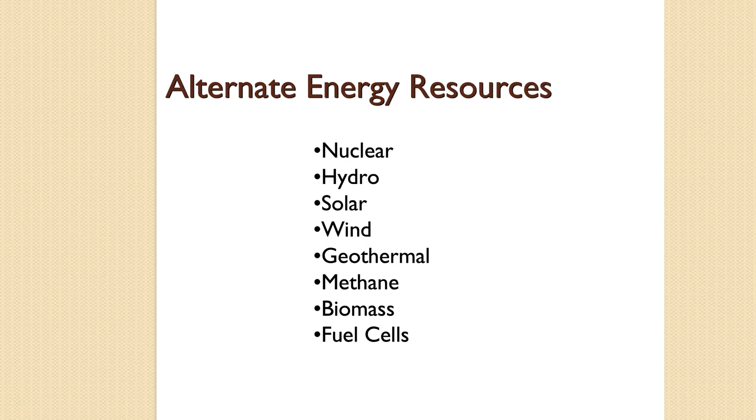First on the list is nuclear. It's been around for a while, and it is popular. As far as your notes, the part you need to know is about fission, which is our current technology, where the atom is split.

Now, you don't have to know all this, you don't have to know nuclear science. I just have this on here to let you know that extra neutrons are added to an unstable uranium atom that then splits and gives off enormous amounts of energy, creating a chain reaction. Our technology is where the atom is split, called fission.

This is really all you need to know for the test. Now, there are some problems with it: a very long half-life. That's how you describe the radioactivity of something—you might say its half-life is 4 million years, meaning 4 million years from now it'll have half the radioactivity it does right now. A lot of this stuff has a very long half-life.

Some of it's thousands of years, some even millions of years, which means waste is an issue—storing that waste. And then finally, add this to your notes, this is important too: uranium is non-renewable. It's non-renewable because once we split that atom, it's no longer uranium, so it is, in a sense, burned up or used up.

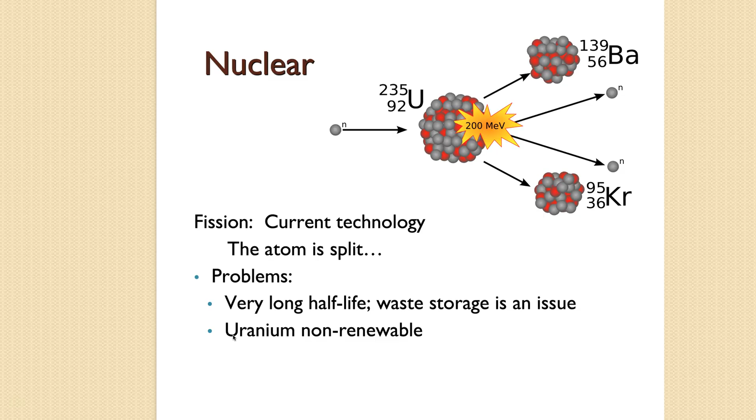So uranium is non-renewable. The way it basically works—you don't have to take notes from this, this is just to help you understand it—this is the reactor, and remember it gives off enormous amounts of heat. In that reactor, they have heavy water, and that heavy water gets heated, and then heats normal water to create steam.

Remember before when we talked about the coal-fired plant, how you use steam to run the generator, that's how you generate electricity. The nuclear power plant is essentially the same—you're basically burning the uranium in the reactor and generating enormous amounts of heat to boil water to make steam to run the turbine.

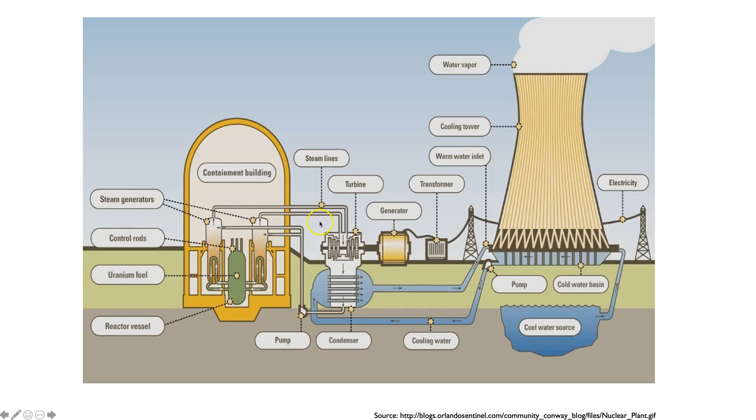Again, nuclear power plants will have these cooling towers. We've seen these before, and you might see these kinds of cooling towers at coal-fired plants and nuclear plants. That water used to make steam has to be cooled before you put it back out the river. But you can tell this is a nuclear power plant by this building shape—that's a containment building, with a very distinct shape.

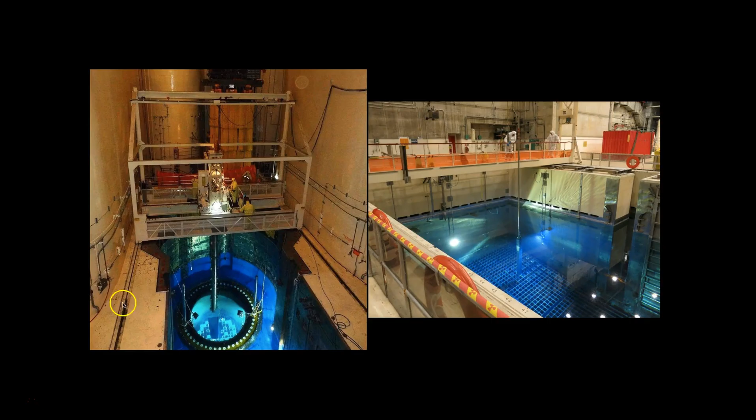If you were to go inside, you would see—and again you don't have to take notes from it—the infamous color and glow given off. These are control rods that they raise and lower. You can see here where they're working within the chamber, and as they raise the control rods out, it allows the reaction to take place.

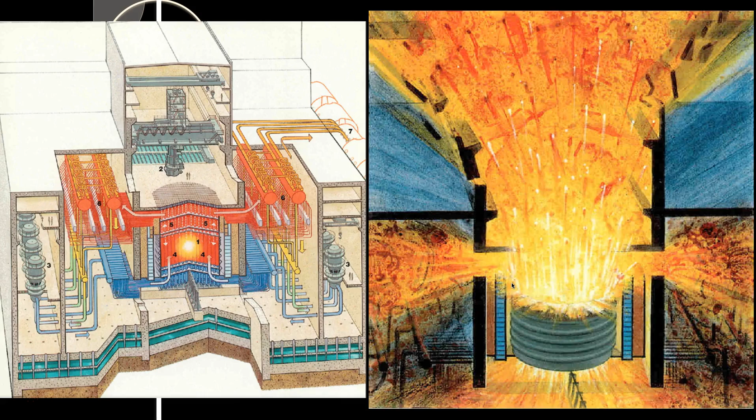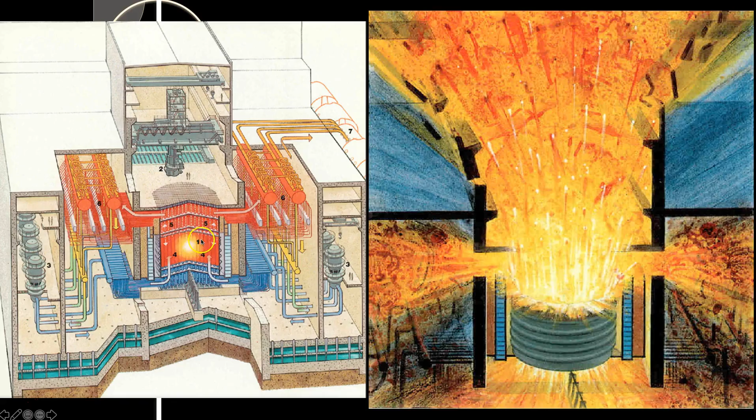Now, the most devastating nuclear accident in the world was Chernobyl. You don't have to have this in your notes, but I think it's interesting to highlight. There, the system uses what's called a dry pile—they don't submerge it in water. At Chernobyl, they were running a test, and it got away from them.

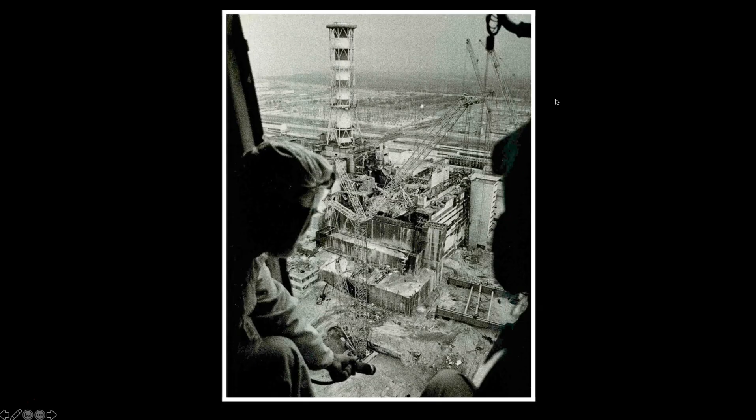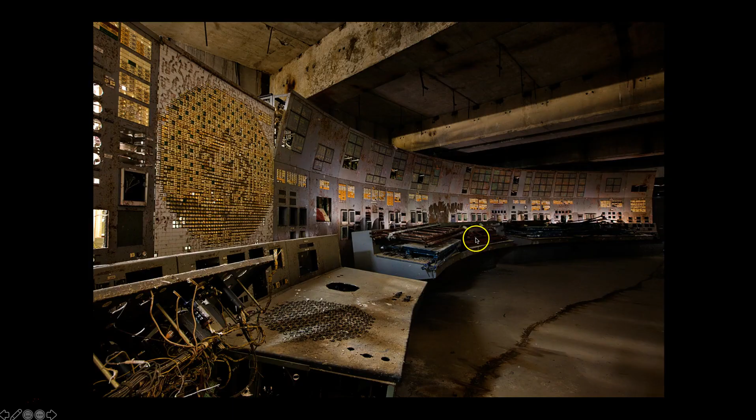It superheated and then basically exploded, blowing out the roof of the containment building, and radioactive material was spread all over the world. You can see down into the reactor area, all of that was destroyed when the reactor exploded. That facility was mothballed, and the whole area around Chernobyl had to be evacuated—it's basically become a ghost town.

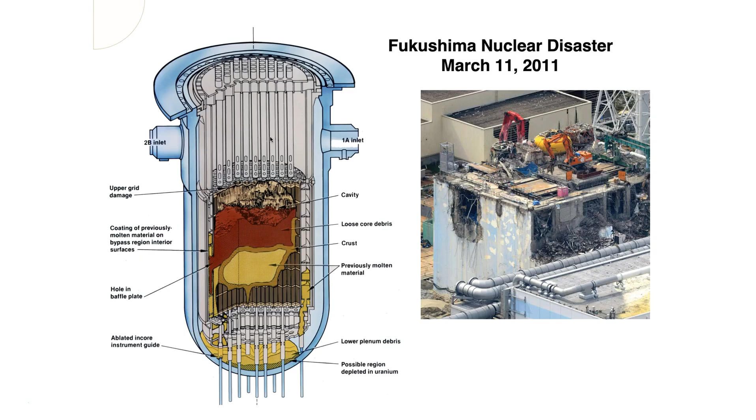One of the more recent nuclear accidents was in Fukushima. What happened was they had a tsunami, a great wave that came up and over the plant, and it shut down the control systems. Then the cooling systems shut down, and the reactor basically melted down. The good thing about this design, which is an American design, is that even though it melted, it was captured within the containment vessel. While yes, nuclear material did escape, it was not to the same extent as at Chernobyl.

When we talk about nuclear, a potentially safe alternative is fusion. In fusion reactions, we're talking about the same thing that happens on the sun — you're creating a heavy element from light elements. In the sun, hydrogen is fused and creates helium, giving off enormous amounts of energy. You can use deuterium and tritium, variants on hydrogen, which are abundant, cheap, and found in ocean water. The problem is that the deuterium-tritium plasma has to be heated to over 100 million degrees centigrade.

It has to be held away from the container wall using magnetic fields, otherwise it would disintegrate the wall. Currently, it's not feasible as an energy source — we can carry out fusion reactions, but it has the potential to be safe and clean because you're not using radioactive material. Deuterium and tritium are pretty stable and safe, and the reaction won't get away from you, because if it does, it just cools off and shuts down. So it's ideally much safer.

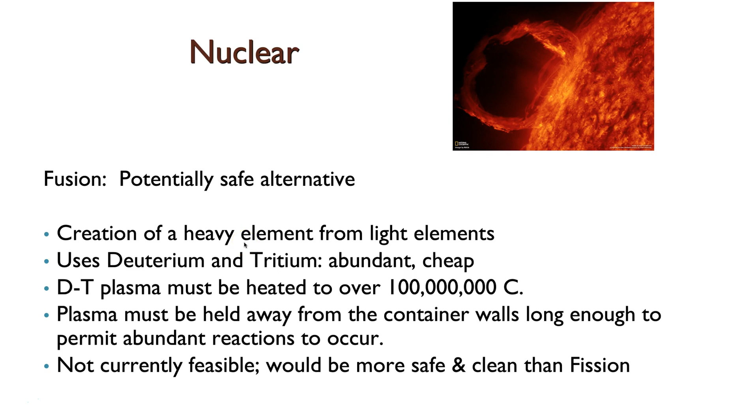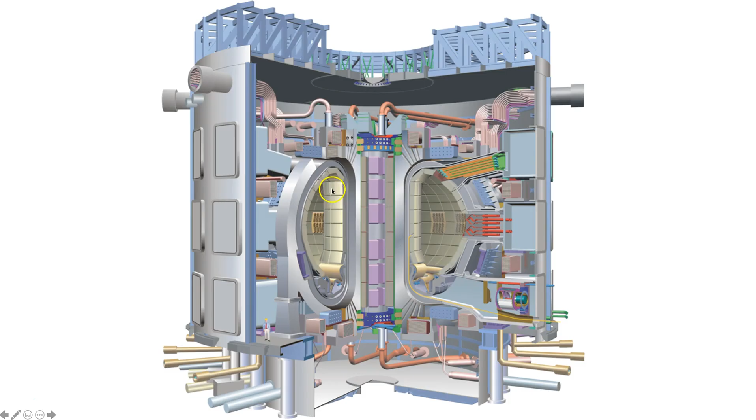This is a fusion reactor. Again, the difference between fusion and fission: in fission, you're separating the atom; in fusion, you're jamming them together. This is a cross section of the reactor — it has a circular donut shape, and these panels create a magnetic field to keep the material away from the walls.

Throughout the world, there are other types of alternative energy, like hydro, tidal, and wave power. The U.S. leads the world in hydroelectric power, which is actually 10% of our electricity. The thing about hydroelectric, tidal, or wave power is that it has limited sites for development — you need running water and a good steady source of it. Without that, you won't have a site to generate electricity. There are also environmental concerns; when you build a dam, you change the habitat and function of the river.

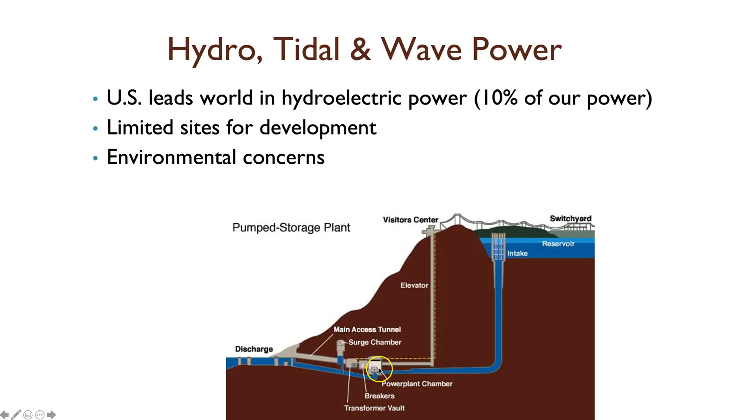Some of the more unusual setups are like this storage plant at Raccoon Mountain, just outside of Chattanooga. Here they let water through a pipe, which runs through a generator and out into the Tennessee River, generating electricity.

Here you can see a cross section of a hydroelectric dam. The dam backs the water up and creates a sort of head pressure. The water goes through a pipe called a penstock, spins a turbine, which spins a generator, which makes electricity. You can see the generator as water flows through spinning the turbine, which looks kind of like a prop off a boat, spinning the generator to make electricity.

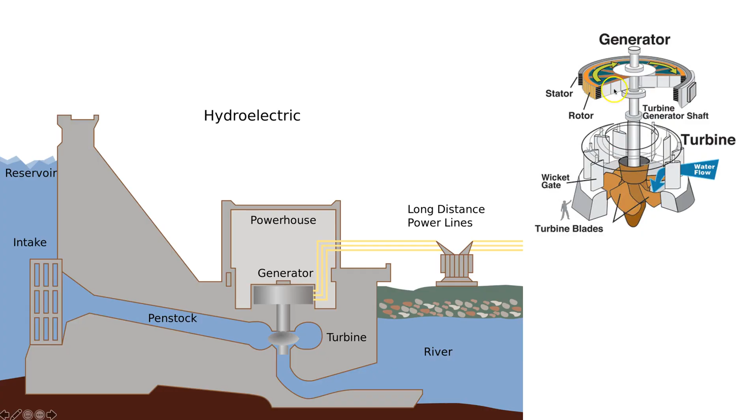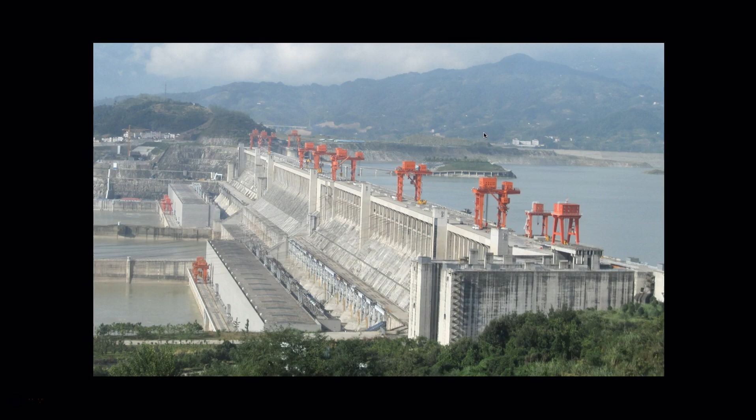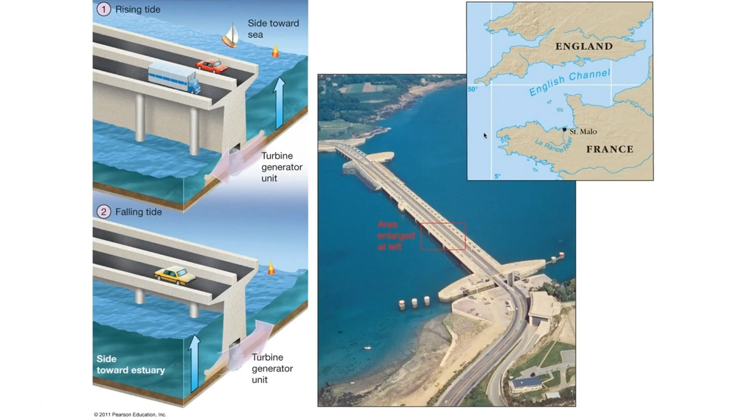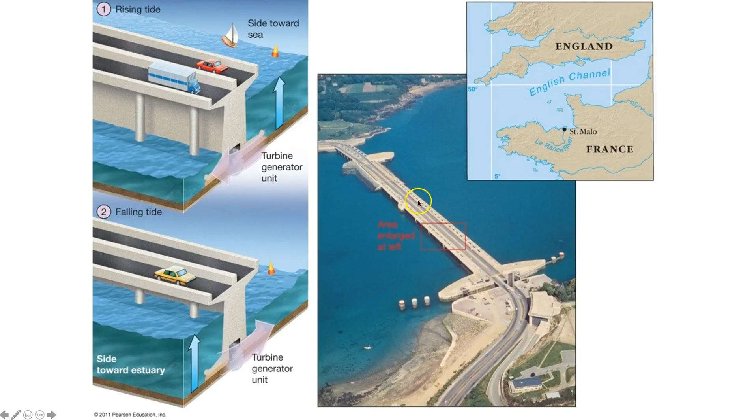Now, tidal power works like a dam — as the tide comes in, water flows in across a generator or turbine, and as the tide flows out, it goes the other way but still generates electricity. So you have this dam-like structure, and as the tide goes in and out, it generates electricity.

Next up is photovoltaic, or PV, or solar energy. Currently, it's an expensive way to make electricity — the panels are expensive, so energy production costs about 2 to 4 times mainstream sources. Still, there's interest in photovoltaic. Some states, Tennessee included, allow private solar producers to connect to the energy grid and sell off their excess — the panels make electricity when the sun's shining, and if you make extra, you can sell it to TVA.

This is an important point: for a photovoltaic facility, construction is very expensive, so the front end is costly, but there are few moving parts, so upkeep is minimal and inexpensive — there's not an ongoing expense.

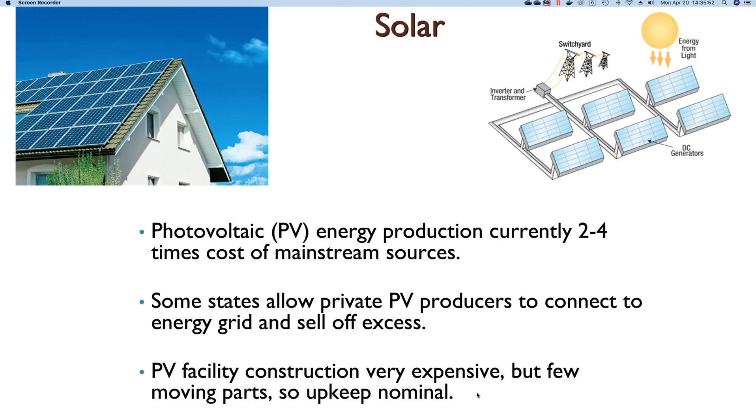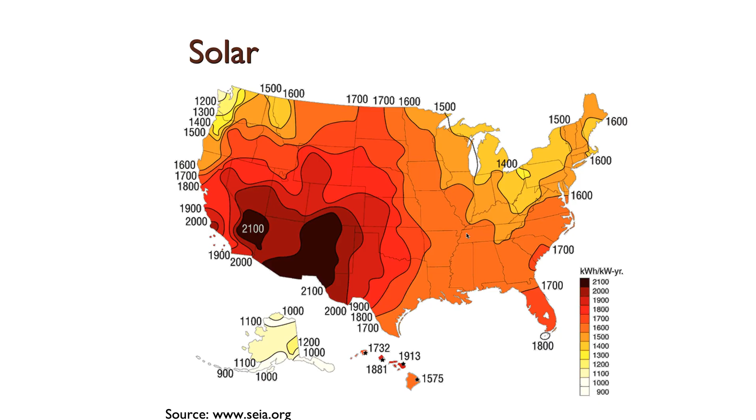This is just showing you a map of places in the U.S. where solar is viable. Quite frankly, much of the lower 48 is viable for energy production, especially out in the Southwest, where photovoltaic is very effective. Even here in Tennessee, photovoltaic is not a bad option, other than the fact that the panels are expensive.

Some areas out in the Southwest have these solar farms, and you can actually see them from the air. If you fly into Las Vegas, you can really see several of these out in the desert.

Wind. There's been a lot of interest in wind in the last few years. Now, like solar, the problem is it has limited storage capacity. That is, when the wind's blowing, when the sun's shining, you have electricity. When the sun's not shining, when the wind's not blowing, you don't. So that is a serious problem with wind and solar.

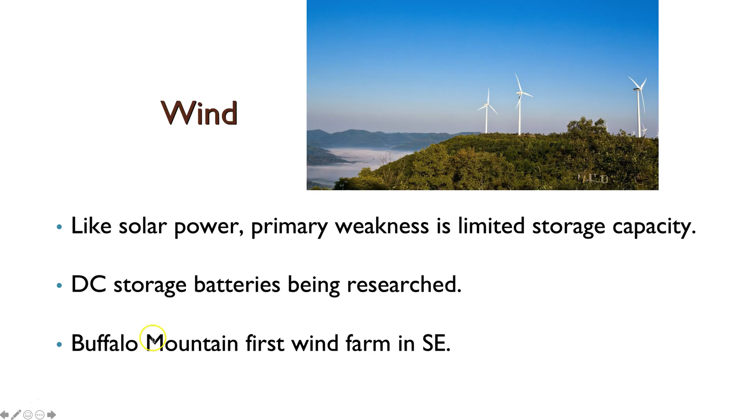Buffalo Mountain here in Tennessee was the first wind farm here in the Southeast, so it was the very first one. Again, the way wind works is it spins this rotor or blade, and it spins a generator, which generates electricity, just like all other electric production.

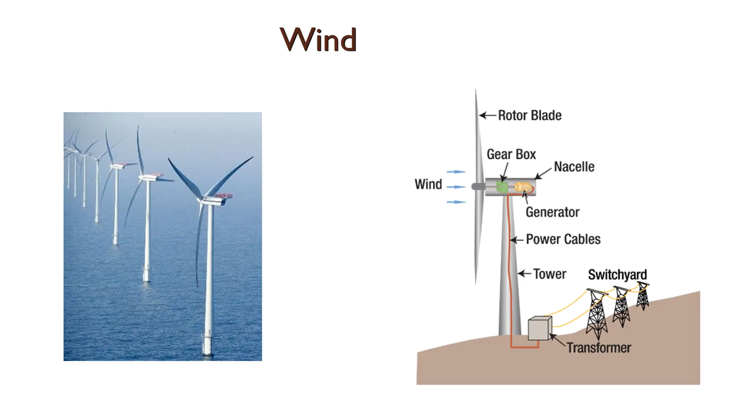Now, this is a map of where wind production can be. You can see the places that are purple, red, and blue are really, really good. Notice where we are here in Tennessee - not so good. And that's not because we don't have wind, it's just not steady. We don't have very many wind days, so it's not very effective. Now, on the coast, where you have steady sea and land breezes, obviously this is good. But you get inland here and it's not all that great.

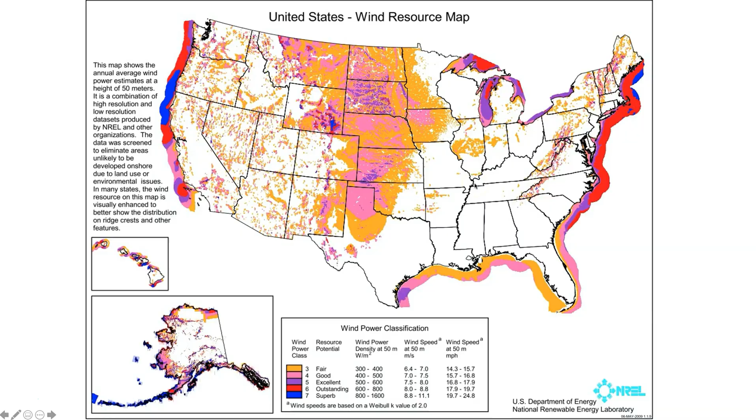Next up is what's called geothermal energy, and that's where we use steam from a geyser or a volcanically active aquifer. Basically, underground you have lava, and water is either naturally going into it, or you can inject water, and that lava superheats the water, turns it into steam. You capture that steam and run it through a turbine, and again generate electricity just like everything else.

There are a number of places in the United States that have a lot of potential for geothermal. It is cheap, it is clean, but very limited in what we can do. The minerals from it are very corrosive on your equipment. If you go, for example, into this region of Wyoming where Yellowstone is located, you'll see a lot of geothermal features like geysers and mud pots, and one thing you'll notice is the sulfur smell. That sulfur can create sulfuric acid, which is obviously very tough on your equipment.

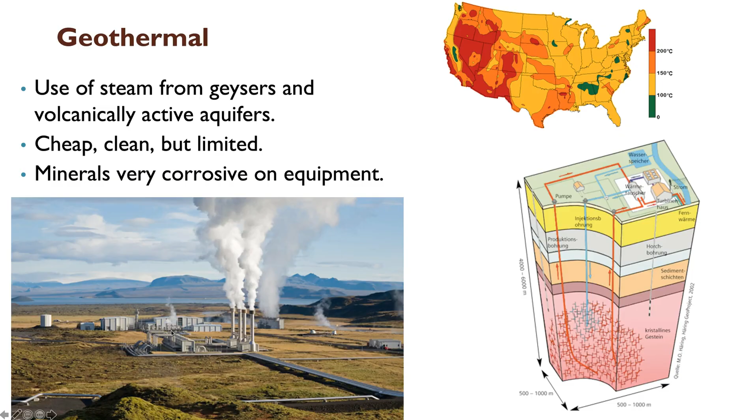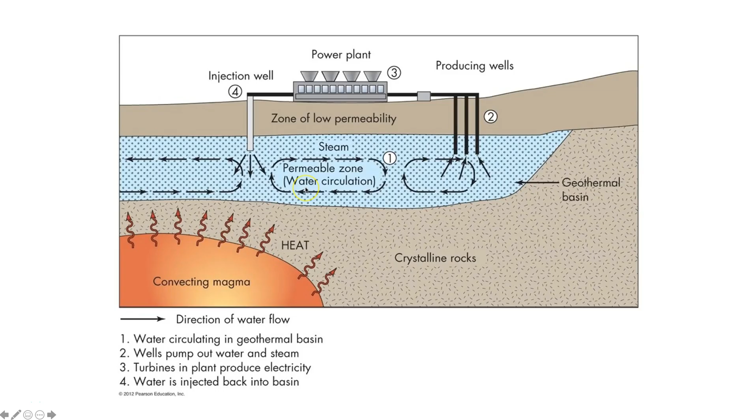This plant right here is in Iceland, and in fact they have managed to build enough plants that I think all, or most all, of their electricity comes from geothermal production. But again, the way it works is there's either water already there coming up as steam, or you inject water into the ground that gets boiled by the magma, generates steam, and you run it through the power plant to make electricity.

Now, another alternative is methane. Methane is created - it's a gas byproduct of anaerobic bacteria. Anaerobic bacteria are bacteria that do not breathe air. So whenever you have, let's say, a pile of leaves that are underwater, if you've ever noticed, you can poke at it and bubbles will come up. Well, those bubbles will contain methane.

Gas production in animals - you and I, or cattle, we have anaerobic bacteria that live in our bodies, and we actually will produce methane gas. It's a gas product of anaerobic bacteria and the decomposition of organic waste. So things like livestock waste, human waste, and garbage can create that.

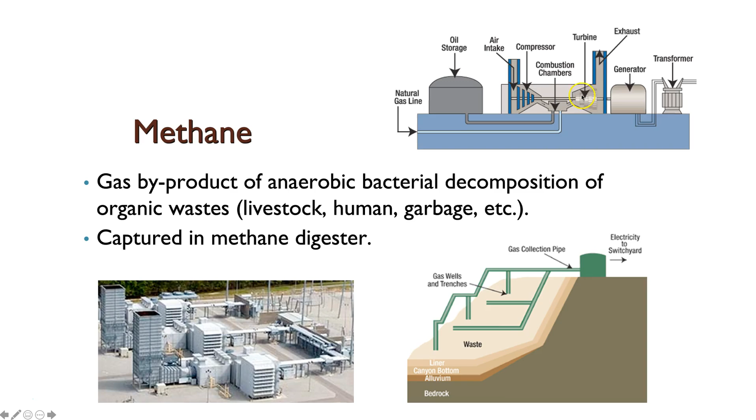In this example, I'll show you a landfill. It's not uncommon where you bury waste that you will have methane gas produced, and you can actually collect that, burn it, and again, just like before, instead of using oil, you use that methane gas to run a turbine, run a generator, and make electricity.

Now, another alternative is biomass. Biomass is fuel made from living or once-living material. One example is ethanol, which is a form of alcohol made from corn and sugarcane.

Here in the U.S., we've been good at making alcohol from corn for quite some time. We actually have a number of ethanol plants, including one over toward the Mississippi here in Tennessee. When you go buy gasoline, typically at the pump, we're buying what's called E10.

It has 10% ethanol in it, blended with the gasoline, and that's typically what we use today. Now, if you have a car with a yellow gas cap, it means your car can burn what's called E85, which is 85% ethanol.

You can't put that in every vehicle. Like in my old pickup, if you put this in, it won't run because it doesn't have enough energy and it doesn't run well. Some people even try to buy ethanol-free gas for their lawnmowers and things like that.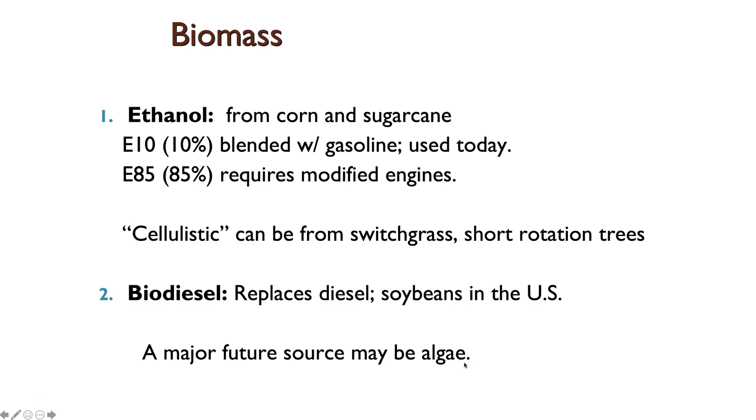A lot of corn goes into the production of ethanol, so you can make a liquid fuel from it. Other parts of the world use sugarcane, which is actually pretty good—it's got a higher density of carbohydrate, so it's good at making it.

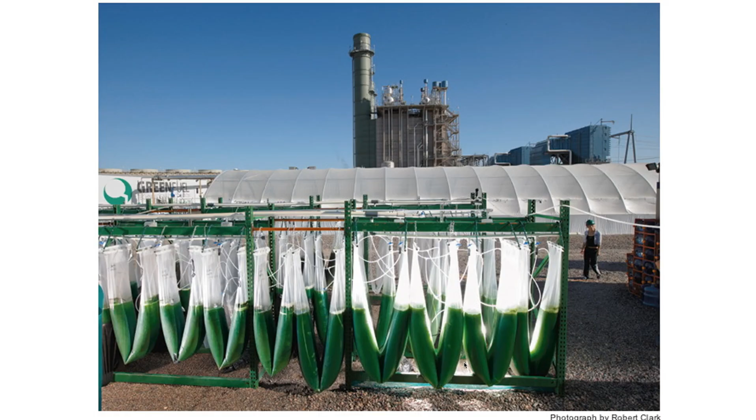We use soybeans to make biodiesel. And here's one of those systems where they're growing algae to generate algae oil to make biodiesel.

Third thing with biomass is just simply burn it. You can burn wood, you can burn switchgrass, and in fact it's probably the most efficient thing you can do. TVA will mix wood chips in with their coal-fired plant, and as they describe it, cogenerate electricity.

They make electricity from burning wood. It's actually considered to be carbon neutral because whenever you burn that wood, yes, it releases carbon, but when you grow that wood, it ties carbon up. So in theory, it's carbon neutral. Same with switchgrass—we burn it and use that heat to make steam to turn the turbine.

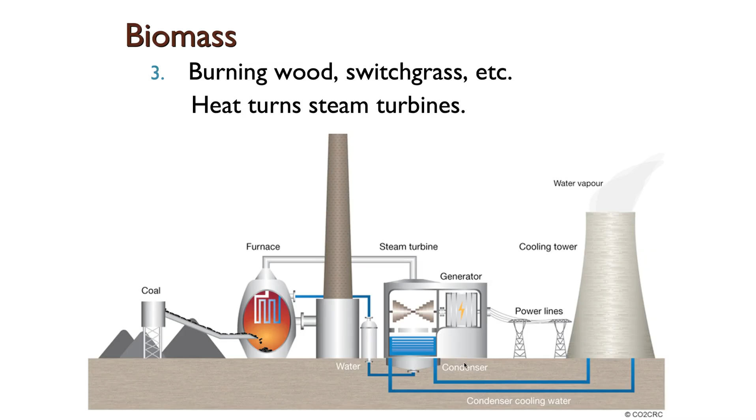And then our last alternative energy is fuel cells. This is actually a pretty exotic system. It was developed by NASA to solve a problem they had in the space program.

What a fuel cell does is convert hydrogen to electricity with water as the byproduct. NASA had a problem where they needed to cut down on weight. Well, batteries are very heavy, and so was water. Somebody figured out that with a fuel cell, you add hydrogen to it, and they carry a great deal of hydrogen as fuel for the rockets on the spacecraft.

Run the hydrogen through it, and it will react with oxygen and make water. So they solved two problems—they could make their water in space with the fuel cell and generate electricity as well.

So there have been fuel cells for cars. Honda famously made one a few years ago, and as you drive down the road, you basically have water coming out of the tailpipe. So you can generate electricity with a fuel cell. Now, the reason you don't see very many of these on the road is they're very, very expensive to produce. So that's kind of been a limiting factor.